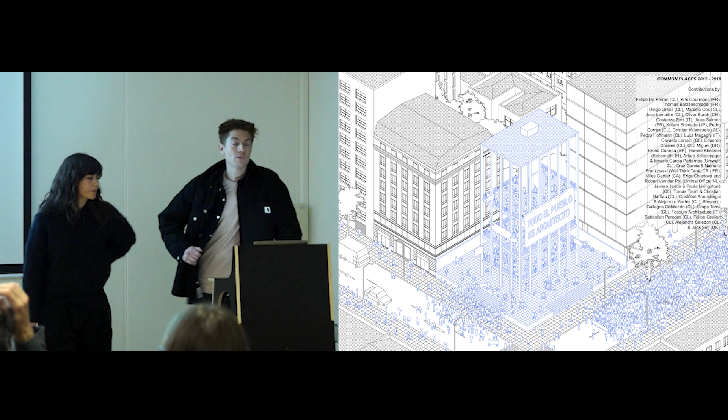This is, in a way, a very important moment of the practice. It was probably the first project we launched. It was somehow research inspired by many other researches and colleagues, really trying to find strategies to maximize collective space. It included a vast amount of people, young architects, the vast majority, and the idea was to really, through a very simple format—one isometry, one text—provide a potential strategy that decision makers and others could somehow take as a model or as a kind of idea.

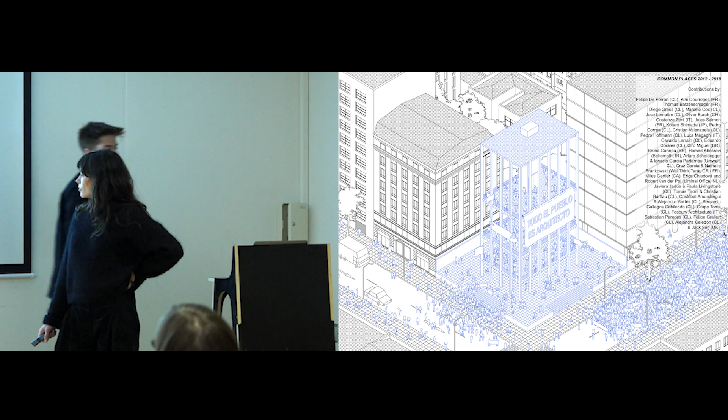And it's important because in this, what you see here is a display. People were saying all people is architect—which is something we like to believe also—that architecture is not done by experts, but actually by people using strategic knowledge, common sense, and not much more.

In a way, this is also very summary. The reality is much more complex than this, but in the presentation we will go through three main ideas: architecture as a common field of knowledge, the idea of the architecture of commons, and the idea of self-commission or self-initiative—the idea to find a project to develop. The two last ones, architecture as a common field of knowledge and self-commission, are somehow informed by parallel projects that we will also explain and introduce briefly.

So it's also important to say that since the very beginning, Plan Común is a flexible structure. We have been dealing with different phases. We were quite established in Chile during 6 years, and then we decided to re-establish the practice in Paris, which is not evident because our practice was a bunch of projects. But we decided to move, and you see that there are many phases at the moment, or let's say three main phases.

We now have the studio based in Paris, but also in Chile, in Santiago. We have a partner there, and the current structure in Paris is the three of us: Kim, me, and Thomas Batzenschlager, the third partner, which unfortunately cannot be here as well because of other commitments.

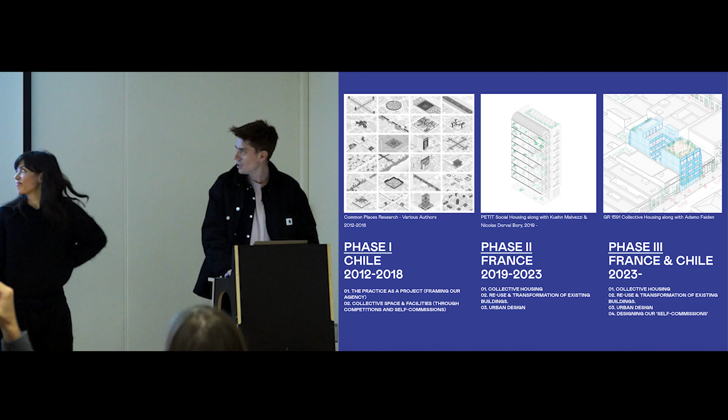We have this also very important—so you situate it, it's a practice founded in 2012. So already 12 years of practice now.

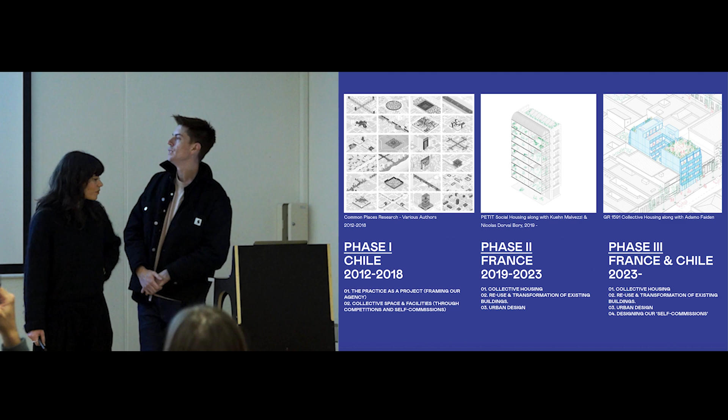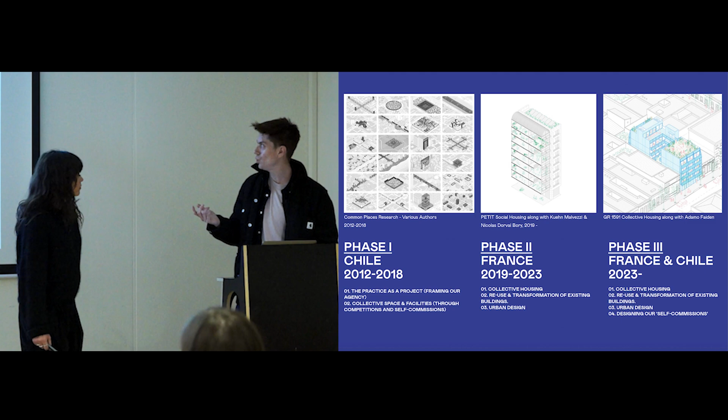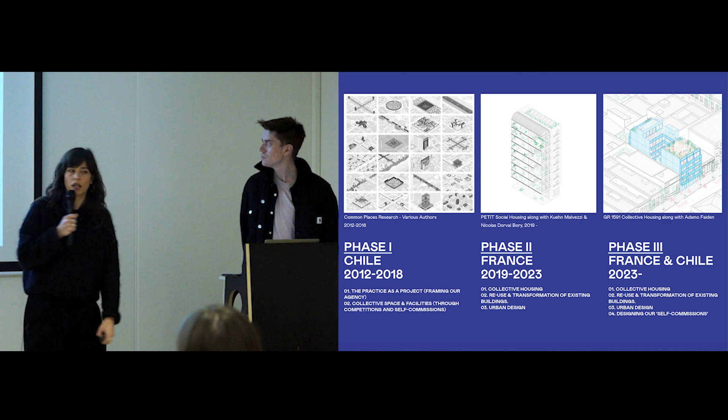In the beginning, during the first time, we went through developing the practice as a project with this attitude towards commissions, towards self-commissions, and so on. Then there is the re-establishment in France, where it's mainly about housing in different formats and reuse of buildings. And the third phase, which is somehow in the middle—reopening, reestablishing the studio in Chile, but also having this idea of self-commission. So we could summarize that phase one is developing these ideas about collective space and facilities, phase two in France is applying these ideas to collective housing among other projects, and now phase three is re-establishing the practice also in South America and expanding this idea of self-commission that we will explain later.

So first part, just so you don't get lost, is about architecture as a common field of knowledge—to understand our practice as a weaving of received ideas.

Since we were students, we started a project of talking with architects, with colleagues, and also filming architecture. This project, since 2008, we started with Diego Grass, another Chilean architect also from the same school. We have this archive of architectures—buildings, but also discourses, people doing research, people who are into the project, into a very material world, and so on. All this is a vast archive where we are obviously taking some lessons and learning from our colleagues.

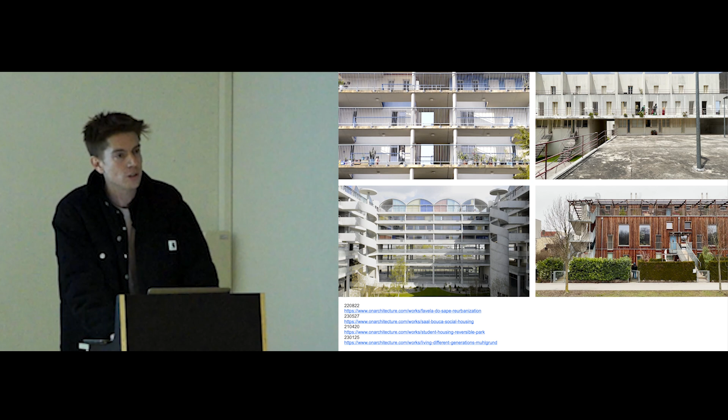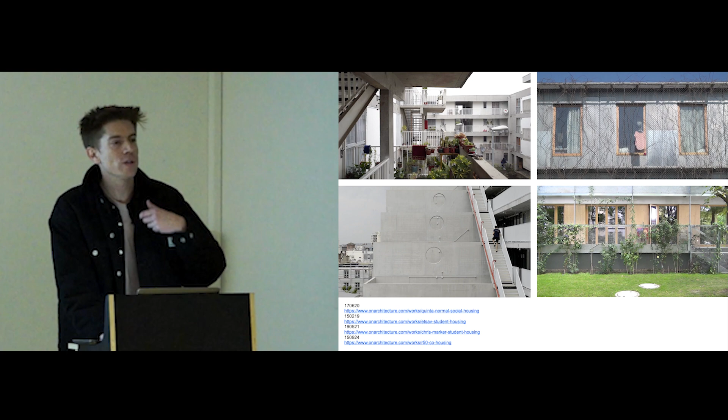Of course, this idea is very opportunistic in a way, but during the last 6 years we have been dealing a lot with housing, collective housing. We took the advantage to visit several cases and try to learn from these examples, obviously with a certain filter already about appropriation, about the sequences of common spaces, and so on.

The idea of extra spaces, generous balconies, winter gardens, etc. But also, which is quite important, to understand the conditions of the buildings, not only be amazed by the aesthetic condition of them, but to try to understand all the conditions, political, economical, social, and so on and so forth.

That's why it's quite important to talk with the architects, in this case Lacaton and Vassal and Druot. And sometimes with some architects quite insistently, like several interviews and filming several of their projects to insist also on their discourse and to establish a dialogue with them. It's quite important also that the first part is about the ideas, but also it's a way that we found - it was a kind of nice coincidence. We collaborate with a few of these practices already, and it's a very good way to start in a way.

Another idea that we use a lot is the one of poor architecture, defined by Lina Bo Bardi as, in the sense of craftsmanship, expressing maximum communication and dignity through minor and humble means. This is really an idea in which we want to insist in our projects.

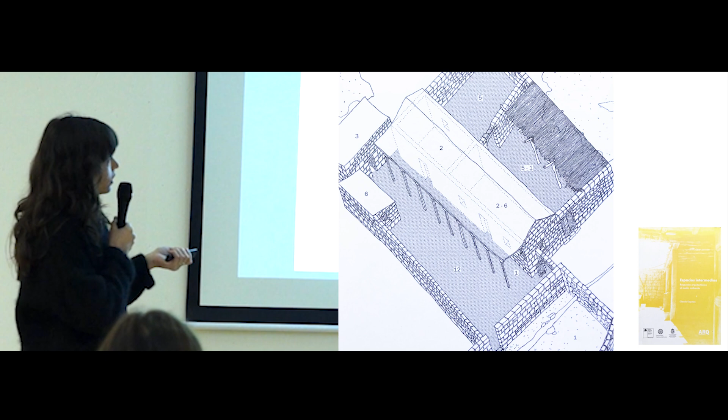There is also the idea of intermediate space, and the definition made by Glenda Kapstein, who's an architect and researcher from Chile, who studied the typical, vernacular dwelling in the northern part of Chile, in the desert, and who defines the intermediate space like this: there are spaces where the inhabitants feel as free as in a controlled interior, but that integrates natural elements - a small world that can be ordered, transformed, and domesticated, so appropriated.

And the in-between condition, there is an articulating space of the totality of the places that make up the program of the dwelling.

And so for us, a very interesting example of this intermediate space in collective housing is the circulations of the Cité Napoléon - let's say one of the first social housing in Paris, or sort of social housing in Paris. And with this circulation in the center of the plot under a glass roof, and with these passerelles giving extensions to the housing towards the collective space.

It is quite important also that forms, architectural spaces, are available in time. So one thing that can be a tool for control in one period, it can be a place for pleasure and collective joy in another time, after a few years - which is the condition a little bit now.

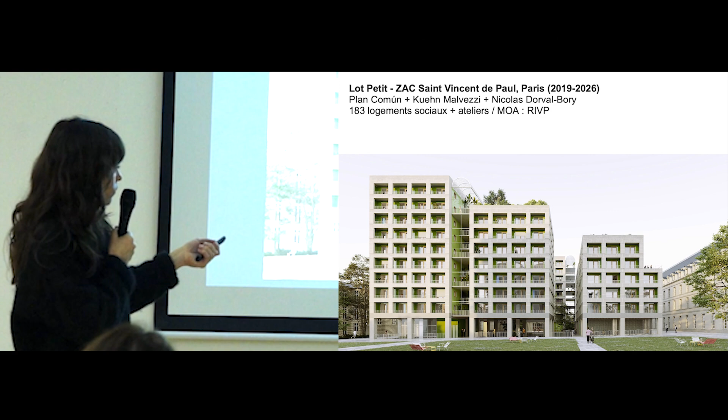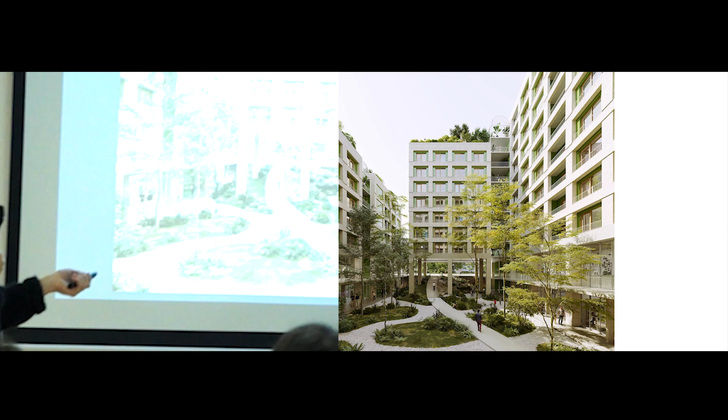And so it's a load-bearing stone building with the timber structure inside, but what's important for us is the intermediate quality of this space in between the housing, the blocks of housing, let's say. This is quite important because actually all the will that we have about maximizing public collective space in Chile - naive or somehow over-dimensioned - then coming back to a real concrete brief, has this form and this kind of proportion, in a way.

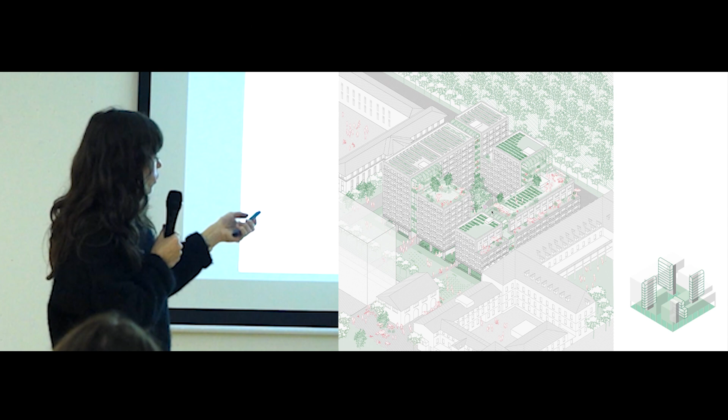And so it's a very dense neighborhood, as you can see, so you can have an idea. It's 56 by 56 square meters, the plot, with a 25 by 25 meter courtyard in the center. It's let's say a hybrid form between a building as a block and a series of buildings emerging from a common plinth. And so what articulates all this housing are these four elements, these four devices.

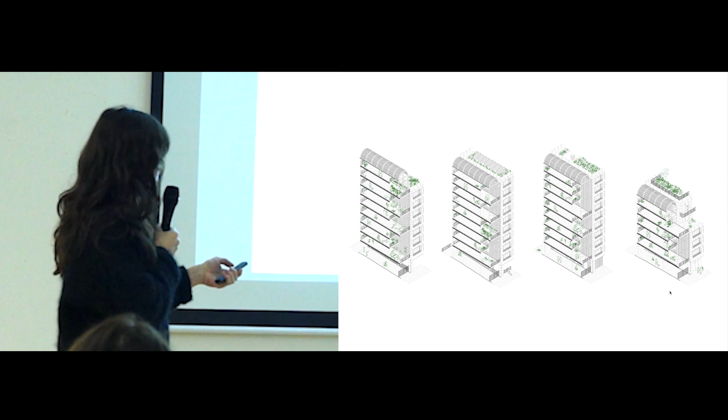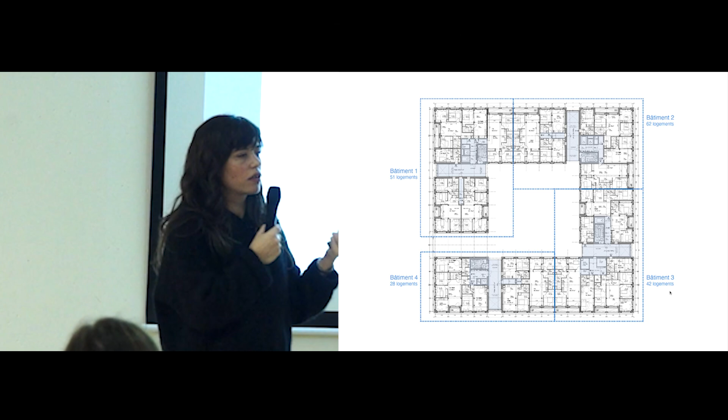These are the vertical commons and this sequence of commons - basically the open air platforms that are partially protected from the climate with the glass facade on the outside. And as you can see, these are the housing units organizing around these platforms. And so these are like over-scale circulations that can be used for other uses.

And they have a specific character and quality with these ceramic tiles, green ceramic tiles on the facades, and this glass bricks dome on top.

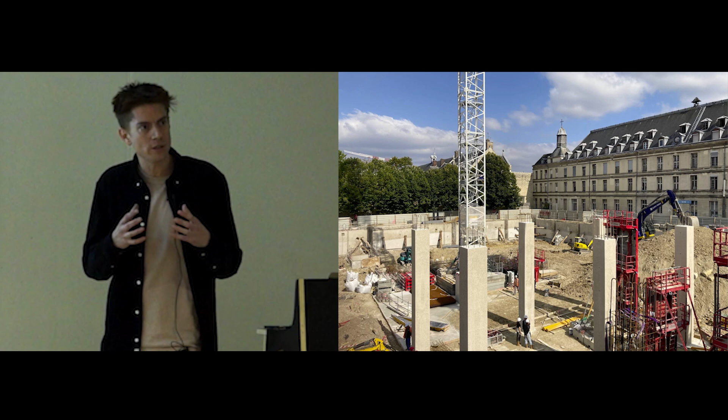It's also important, this is social housing in Paris, which is obviously, you might be more aware of this generosity in cooperative systems or different housing systems in Switzerland, but the French context is quite oppressive in a way. The lack of space we notice every day, so if we arrive to bring something more, we are somehow already happy.

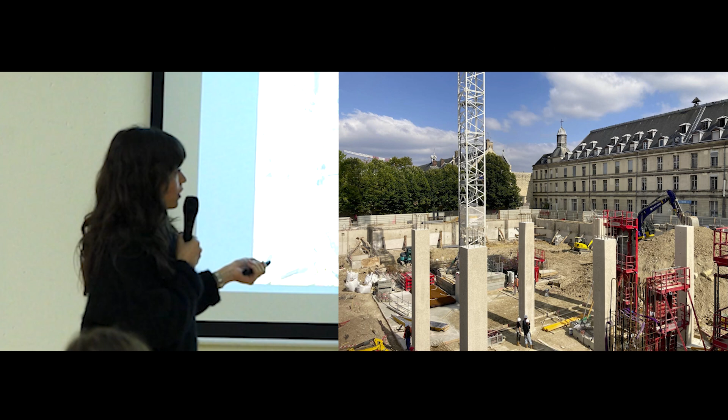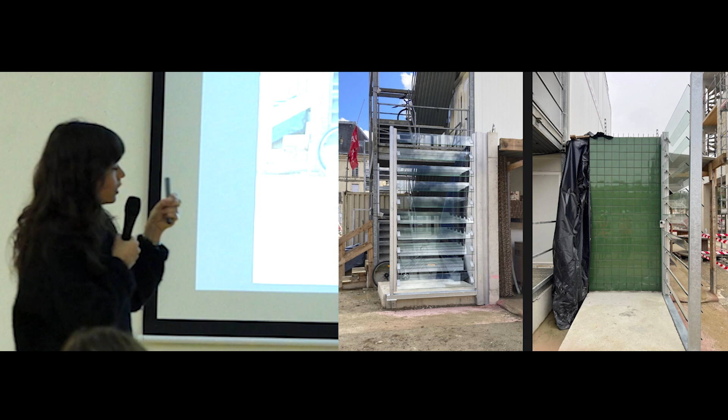These four almost autonomous devices bring this identity to the building, that are, let's say, the central subject in this project. As you can see, we are now on the building, and this is also a specific object, like the prototype for this vertical commons with glass facades and ceramic tiles that you could see in the image.

From this project, we developed this idea of having an almost autonomous device for commons in all the collective housing projects.

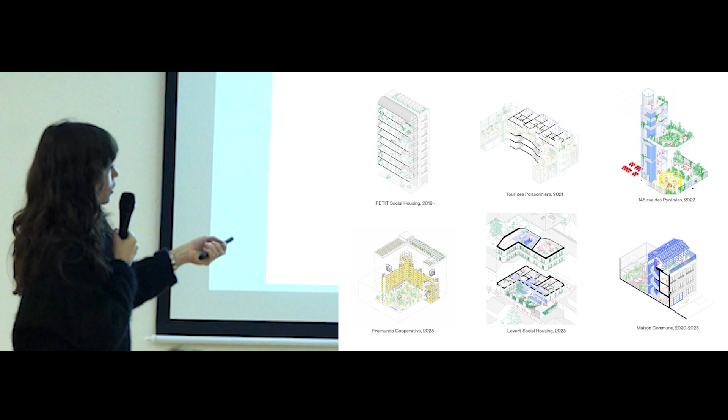For instance, in this rehabilitation, a competition that we did with 51N4E for housing, a social housing tower transformed into student housing, this device takes the form of an addition on one of the facades.

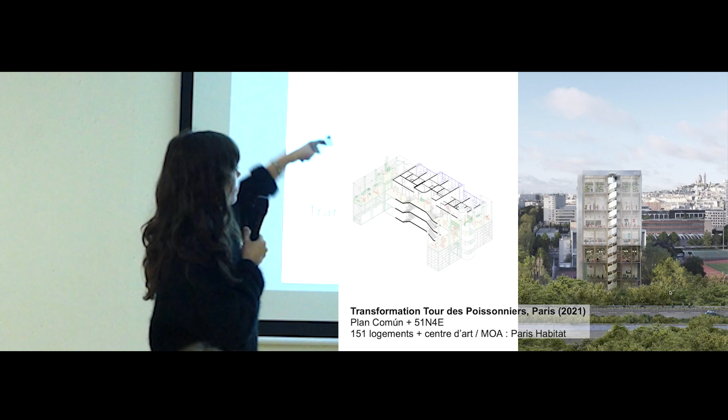We have additions on the four facades, but you have this crossing common area going from one addition to the other through the building. In this case, it's almost like a piece of furniture that makes this autonomous device.

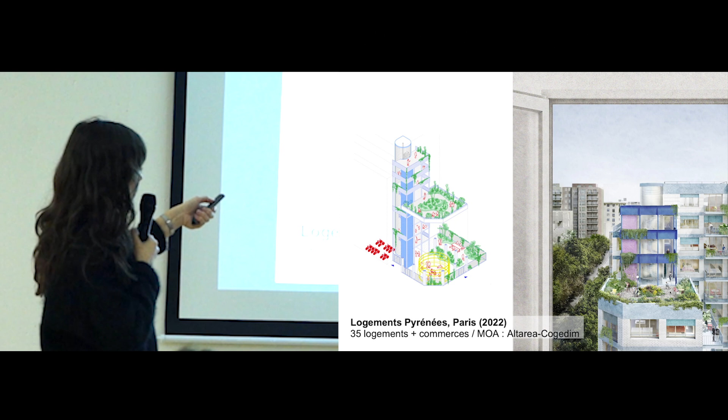In this case, in Paris, a project that we did with a developer and are currently developing, this device takes another form - it's like big platforms, outdoor areas, and there's also an extra space on the ground floor for common areas.

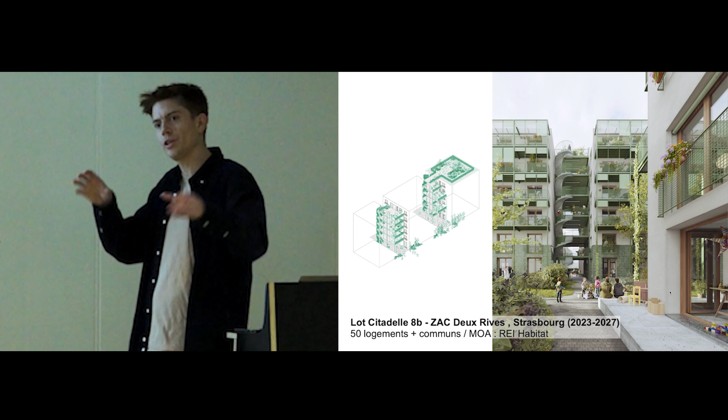Through this series, we've been developing a sequence of commons from the city to the last floor. It can be in horizontal corridor, it can be in vertical circulation, it can be an atrium, whatever the typology - it's about finding the scale, proportion, and character of these spaces.

This project in Montevideo, Uruguay, which we are doing with Adamo Faiden from Argentina, is also a self-commission. You have two blocks separated by a courtyard, with all the commons going around this courtyard.

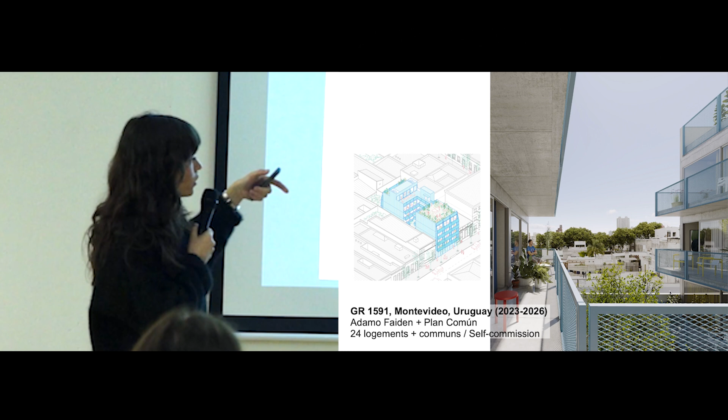Let's start with the context. The house is actually not in Paris, it's in the city of Pantin, which is really in the north next to Paris.

It's also quite interesting, and funny, that this place is really next to the second biggest cemetery in Europe, which is around 112 hectares. It's a coincidence because we spent 5 years researching the cemetery in Santiago, the main cemetery there, as a metropolitan garden. So to be here, next to the cemetery, even if it's quite different from the one in Santiago, it's somehow interesting.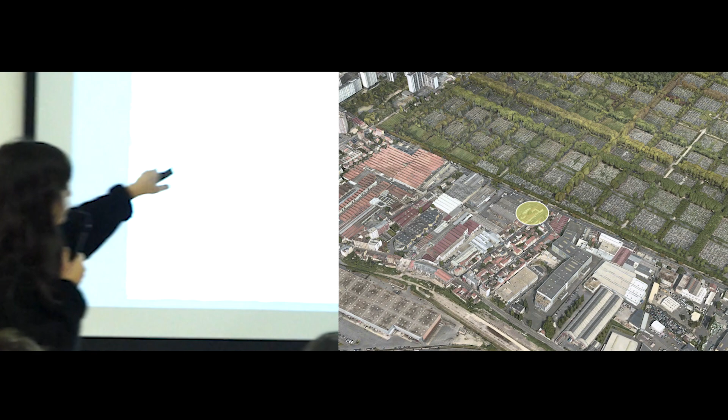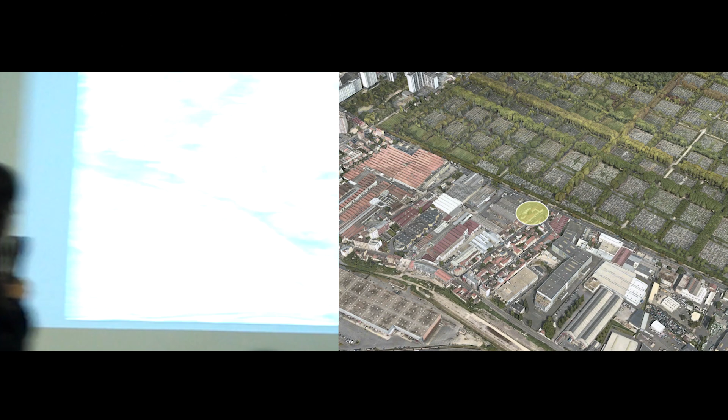So it's a small residential enclave inside this industrial area that is still in use, small industrial. And there is even a kind of association of the quartier, of the district, of the small neighborhood, where people organize already. So there is the situation more in plan, let's say, a small neighborhood surrounded, enclosed by industries of different kinds.

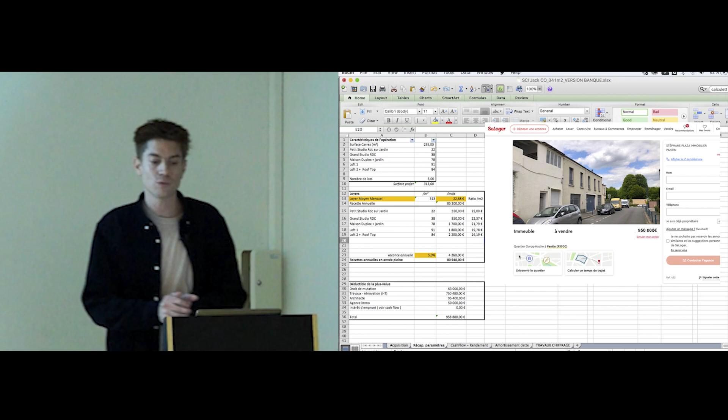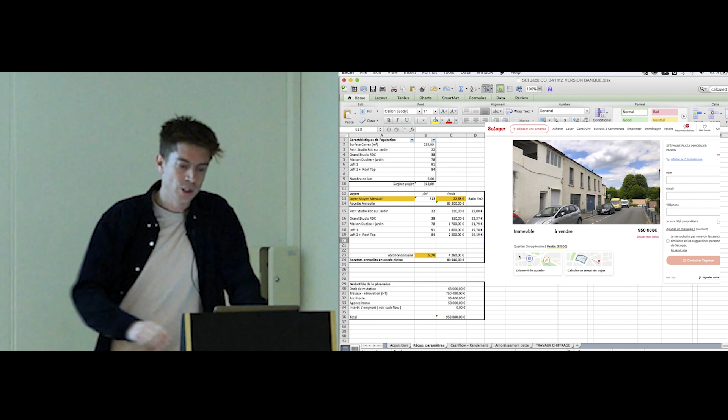And then, coming back to the idea of self-commission, the initiative that we took from the studio, with a very specific expertise by our partner Nissim Hagenauer in looking to find the investment to buy the house and start a project.

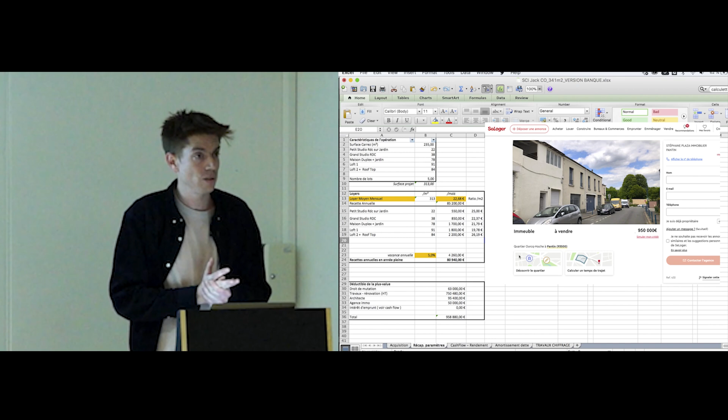Now you see the rough numbers over there. The idea was to actually meet people, a very close bunch of people, for bringing this idea of renting the building, not for selling apartments. Yes, the idea is to use the savings of people that they would put in other investments anyway, or at the bank, and use it as the initial investment for this project. That's also a prototype.

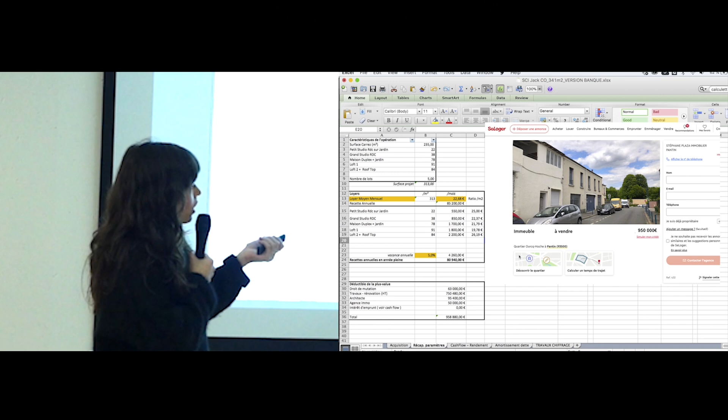We will go further later, but we were kind of lucky. As you can see, we didn't buy a plot, but we bought a house, an existing house. And we were kind of lucky because, of course, there was a developer who was interested, but there was a misreading by him about the urban regulation that was at our advantage, and that's how we got to buy it instead of him.

It's very important to see the house, and this is the only time you will see the proper house because it's not there anymore. The idea, the preliminary project, was to build an extension of this house, and to build already the shared space.

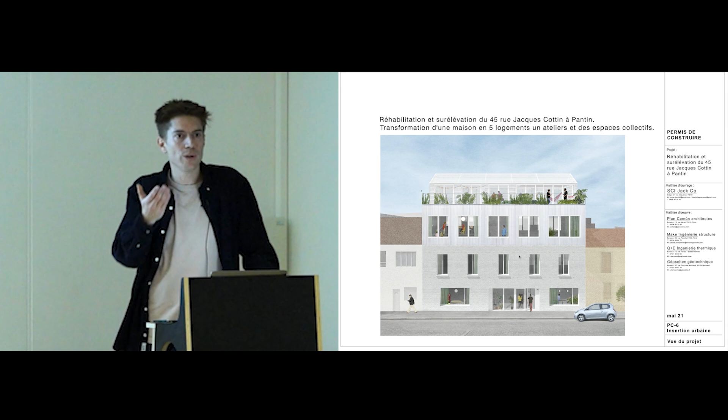We will go through the detail also about regulation, because we could have had one floor more over there, but we decided to have the greenhouse. This was the documents we delivered to the municipality. But actually, through the studies, and you might be aware of the complexities of transforming, which is sometimes more costly, we decided in the end that it was really difficult to keep the building.

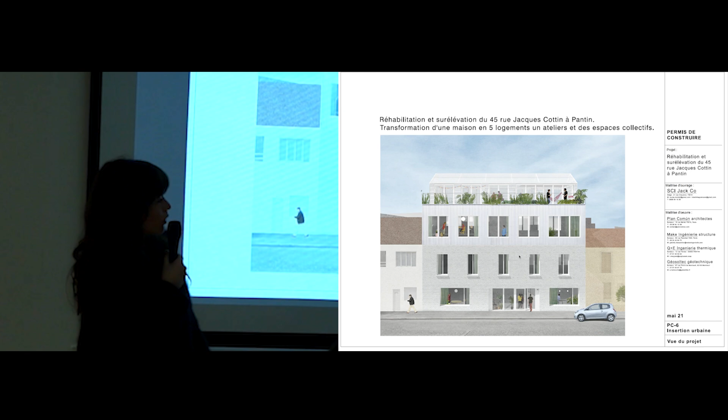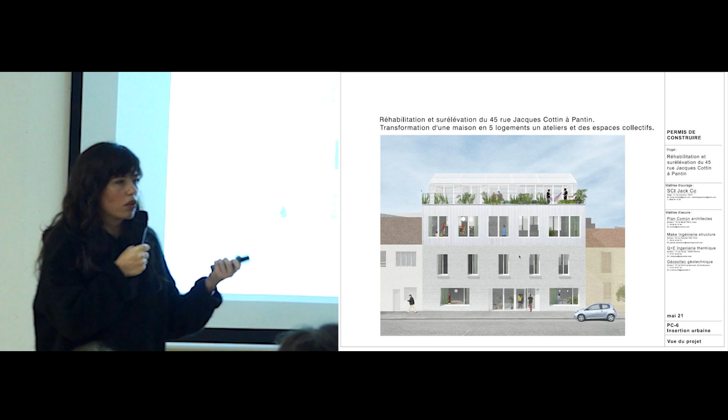Why? Because on the building site, when we started to curate the building, we did an investigation before in the existing walls, but on site we discovered that the brick walls were actually not chained together. There were two layers of bricks that were not structurally linked, so we had to demolish. It was already a decision we made on the building site. But it was a decision.

It was something we were, of course, influenced about, this idea of keeping and finding the quality of this place. But then, in the general context of the whole operation, with the difficulties of the material condition and the fragility of the ground, we decided to build a new one. And this is what we actually introduced to the municipality as a new project.

You might see that it's more or less the same. The sizes of the windows are changing, they are bigger, more generous. Obviously, the structure is quite resistant, and we are trying to bring some specific qualities that you will see afterwards.

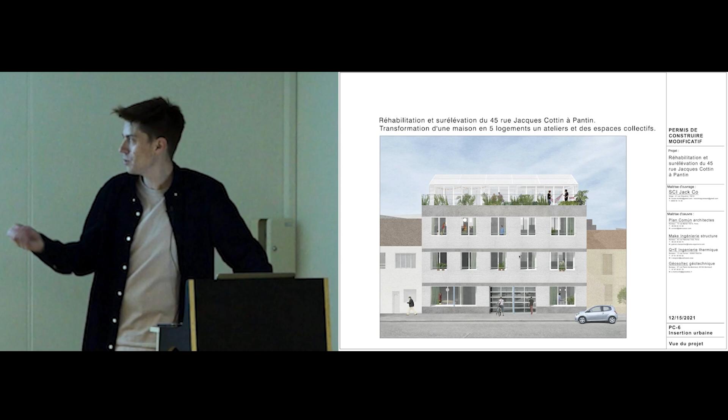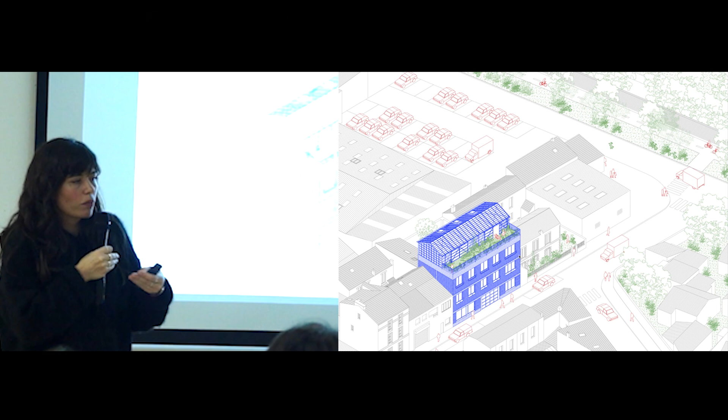But basically this was already something in the process. We were able to adapt the project as we do as architects many times. We were really doing the project on site, drawing the plans almost at the same time we were building.

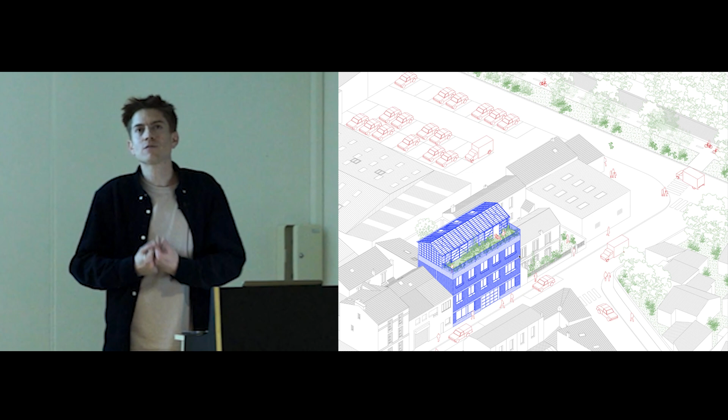So in this case it's also quite important to clarify what I was telling before: that potentially, as for the PLU regulation, we could have had one floor more. It means one big apartment or two apartments, it doesn't matter. But as we are trying to ask for more in each brief, it was the same for us.

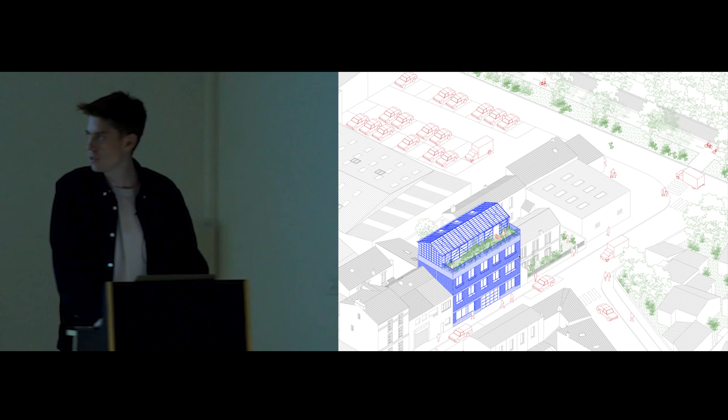So we talked with the investors and convinced them that our approach was to have less density, which would allow us, on one side, to bring a nicer coexistence with the surroundings, with the houses on the sides, because of the lack of light and so on, but also to bring these important shared spaces for us, crowning the sequence.

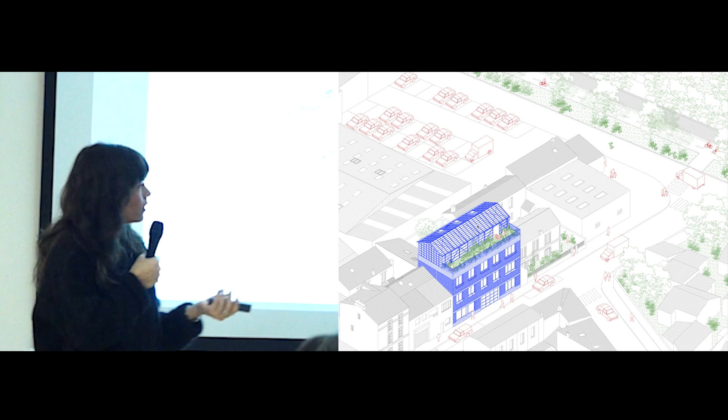The volume that you see here could be all private housing, and we only had to do a little setback on the last floor, but not as much as this one. But actually, as we were minding our own business in this case, we were aware that the numbers were working out anyway, without this extra floor of housing.

So this is the context. We are just next to this very big industrial hangar in the back. This is the more enclosed Quatre-Chemins neighborhood, and you see the urban landscape, which is quite interesting and beautiful. As you can see, we are densifying a bit with regard to the existing situation.

With this extra floor as translucent, more open and generous, instead of housing. It's also important to say the existing house had a continuous facade, but actually it's an L going until the end of the plot. So we took the part in the front and kept the house in the back of the courtyard, which saved around 40% of the original structure.

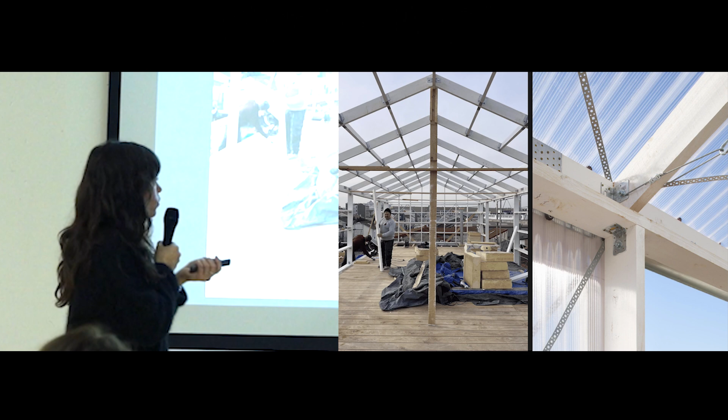So it was a small building, too small for a crane, for instance. So we had to build using construction methods that could be handled by two men, let's say.

For instance, you see the glass house, the greenhouse on top. It's built with one same timber section used for the whole structure, with very simple connections and bracing elements.

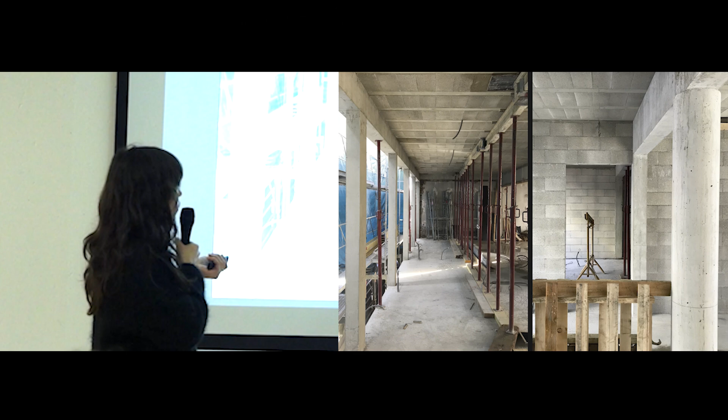It's the same also for the housing, with the concrete skeleton filled with prefab elements like concrete blocks for the walls or also for the slabs.

When we say simplicity always, that's actually not totally true. We are dealing with a lot of complexity in bigger projects because of regulation, administrations, and cultural differences. In this case, it was again developed by us. We tried to bring some clear principles: the concrete skeleton, and then just manipulate the things you can move with your hands.

For the facades, we wanted to use fillings of reused bricks, which was a bit of a gimmick we'd had for a few projects, because we were asked to reuse elements in the projects, and it was always very difficult to do it for the structure or the facades. So it was also an opportunity to demonstrate that it was possible, in technical and insurance terms.

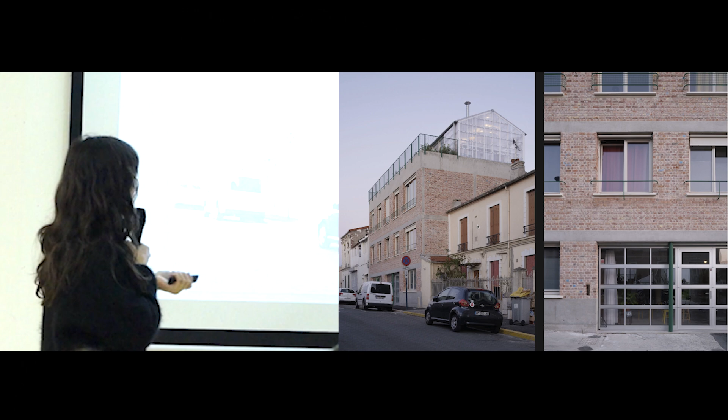As they arrived on the building site, we discovered it was actually beautiful, so we kept them on the facade towards the street with the traces of their former life. But towards the inner courtyard, we painted them white to give unity to this outdoor space.

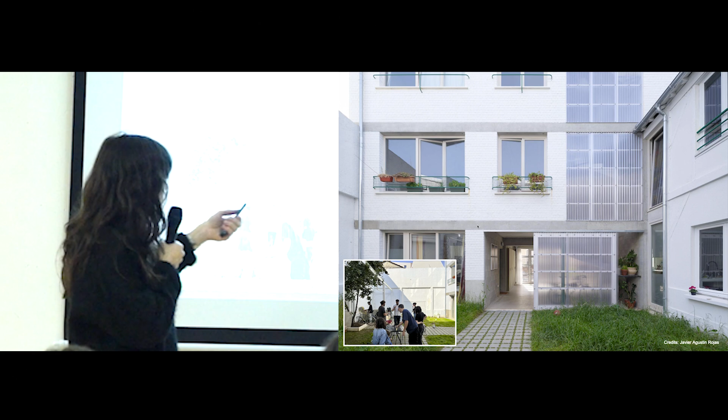Delimited by four different walls of different qualities. This was a very tough decision. We were four partners, and sometimes partners were saying okay, all white or all rough. At one moment we said we don't need to decide. You never have this full comprehension of the building from both sides, and we need the white in the courtyard because of the lack of light, and also the unity with the existing house, the one that you see here.

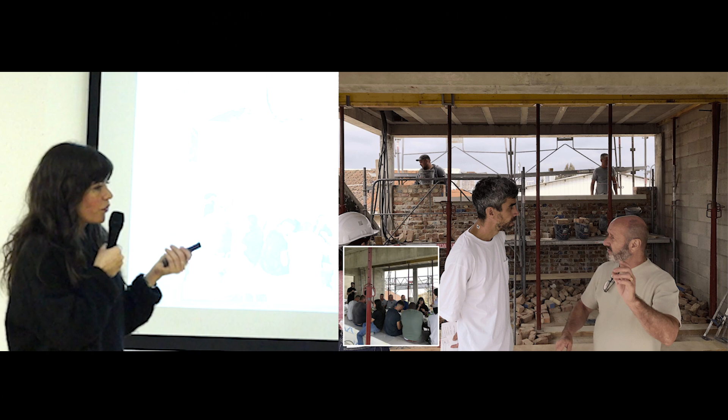We were lucky also to find a constructor used to a bigger scale, and they were really comfortable on this rather small scale building. It was an intense work of learning from each other and finding solutions together, since we were doing the project while we were building it.

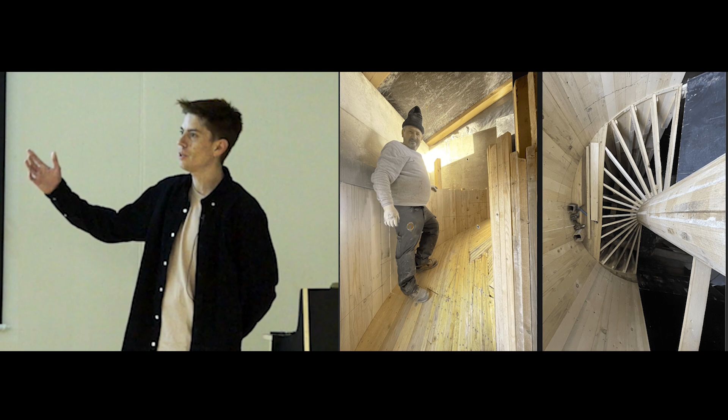And even also challenging the structural engineers. Mario Laporta, the owner of the company, comes from Sicily, and he was doing vaults, working with bricks. He has a lot of experience in building, and he was saying, okay, but we will not do the stairs as you are proposing because it's too big, too over-dimensioned. We will do it in another way.

And we arrived at this very thin stairs because of them, actually. They insisted.

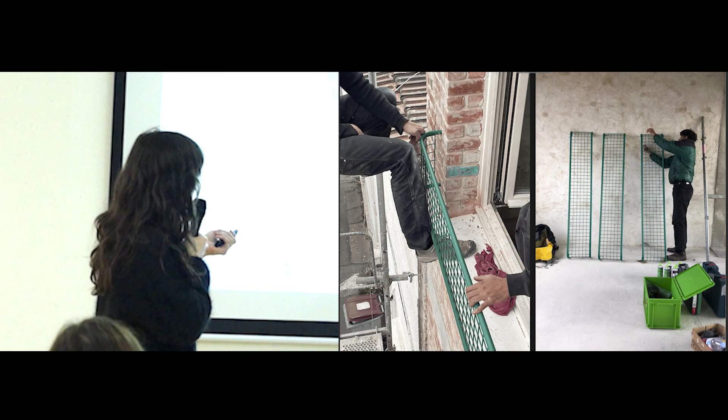Then you would also see there is an issue about the door towards the street of the hall. We worked with, as you can see, a rather rough language, and we took special attention to all the railing and metal in the building. We worked together with Charles Bédin, who is an architect but working as a metal worker, to imagine all these elements that give a special quality to the common areas of the building, like the railing on the facades.

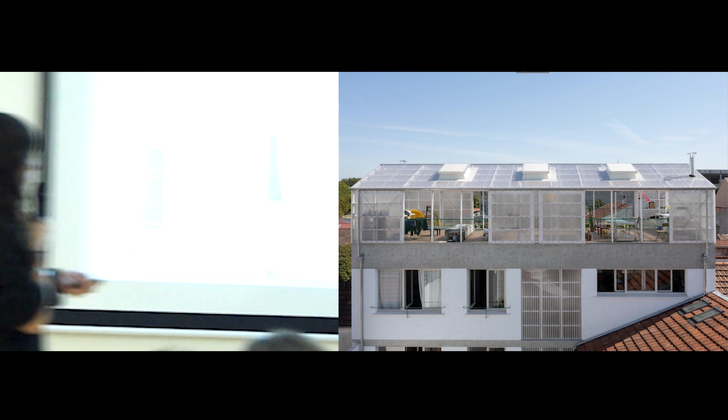Here you can see on the facade this continuity of material from the greenhouse on top to the facade of the staircase, which is this corrugated polycarbonate material, translucent and cheap, very cheap.

As you could see on the other photos we showed, there are no outdoor extensions of private balconies or terraces. All outdoor extensions of the housing are collective and shared.

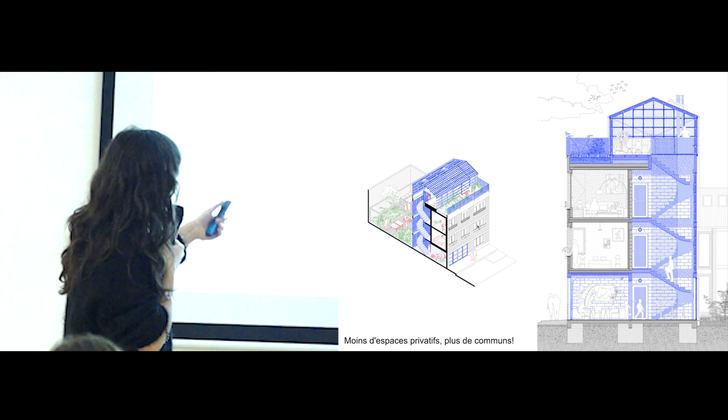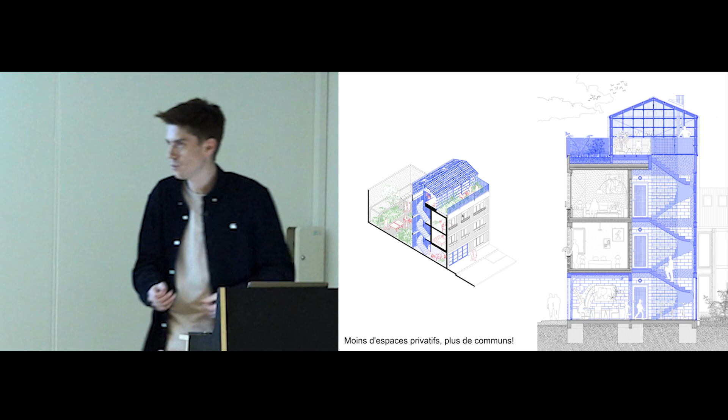Here the sequence of commons starts from the hall, goes towards the garden on the back, and up to this rather small staircase, but with some qualities, and on top the greenhouse and terrace. So it's the opposite of fragmenting, to have the stair circulation hidden, and then greenhouse on top, and then something else. We try to bring coherence and unity in the different floors. This is quite important for us, and that's why we insist on the sequence of commons.

This sequence starts with the hall, with this relation towards the streets that is very transparent, with this sectional door that can be totally open. We had the chance, because it's a small-scale building, that fire regulation allows all the common areas to be open. So we have this continuity of space from the ground towards the top.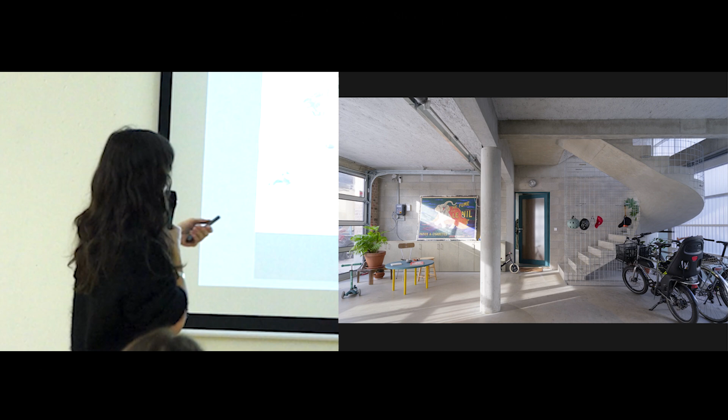Also with the staircase, we were not compelled to close it, so the hall is an open space that can have different uses. It's also a bike storage. You have everything you need in a hall, but it can also be used to have a drink or whatever. It's used for encounters and collective life.

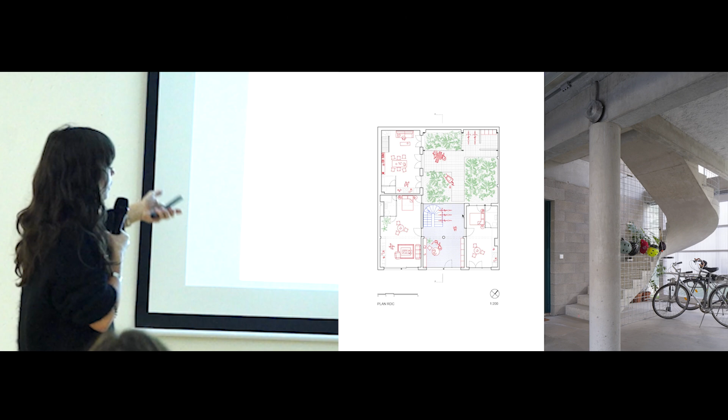You see the proportion of the hall regarding the apartments on the ground floor. The hall and the garden are almost half of the plot. We're adding this sectional door, used normally for parking, but actually we have the structure there, so there's no way we can enter with a car, and we don't need it.

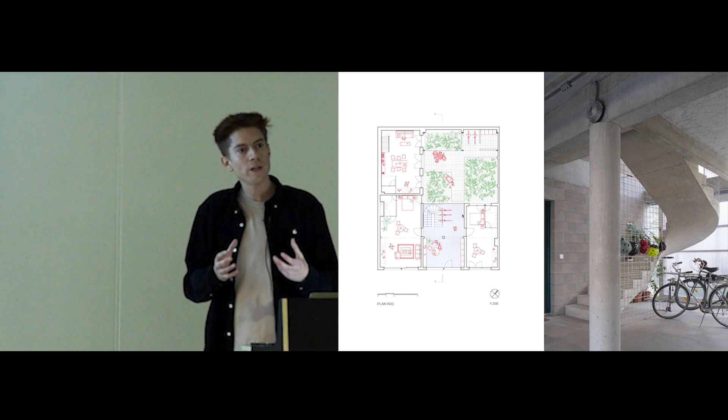The idea was to find coherence in the sequence of commons. As we have the polycarbonate, this lighter material, we wanted a more direct connection with the city, opening when possible, when there is good weather in Pantin. The hall has this extension towards the garden, and is closed on this side with the big sliding door with corrugated polycarbonate. So you really see the sequence on the facade from the inner courtyard rather than from the street.

So this is the sliding door. Very simple detail, and cheap.

The staircase is a very small space, really reduced, not over-scaled like in the Petit building we presented before, but only with this facade. It's a really qualitative space because of this translucent facade, and it's really used every day for collective life as well. It's probably the most used place in terms of collective life. It's where people smoke a cigarette or drink a glass of wine. Every day neighbors go out, say hi, and stay 10 minutes. We weren't all friends in the beginning, and now we're a community of 13 people that uses this place a lot.

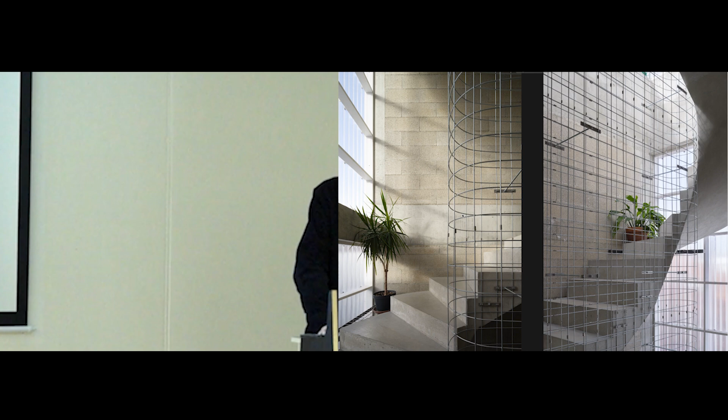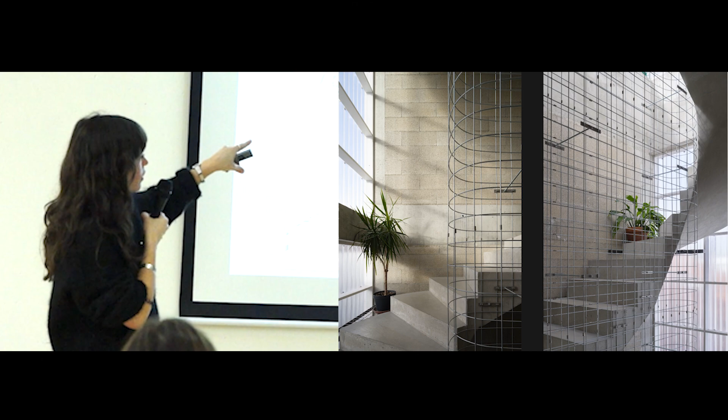With this metal work, it's very simple elements, like a metal mesh of 10 by 10. As you could see in the other photos, it was only folded and then assembled with elements from electrical devices. So it's a kind of bricolage, but it gives these beautiful elements in the center of the staircase that add to this quality.

And then we arrive to the greenhouse, which is the main social space in terms of capacity, but also the place where the propaganda of collective spaces appears more clearly towards the surroundings. You see when it's used, during the day or especially by the end of the afternoon or during night, this lamp in the middle of this weird, very specific context.

And so it's at the same time the cheapest space of the building and the most qualitative, because you are on top, you have this view and these great opening sliding doors. And it's a space that gathered several uses from daily life. We have a kitchen and laundry. You have 2 washing machines that we use there. Otherwise, the private housing units have everything, and they also have the connection for a possible laundry machine, but we use this all the time.

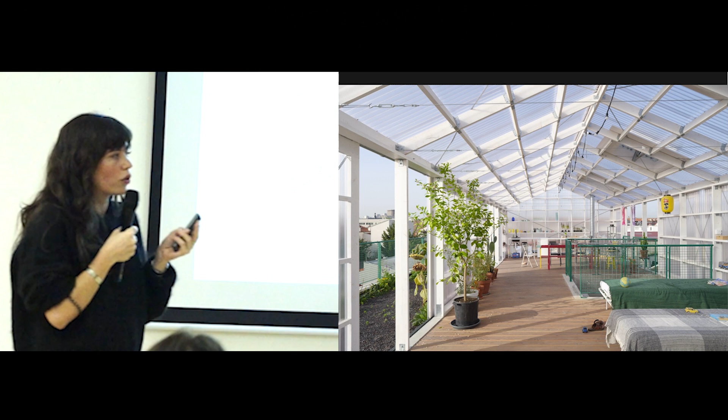And it's a space that is on purpose non-defined, and that can be used for a series of daily or more exceptional uses. As Kim was saying, you have the same section profile in wood, very cheap and not necessarily the way greenhouses are being done here in Europe, or in France, it's less industrial, and we have these cables, so we try to bring the full volume and open to change, open to adaptation in time.

Yeah, and these cables also participate in the small infrastructure of the common areas, as you will see. So we see the relationship with the context again, and from the surroundings of one house of a neighbor. And so there is this terrace in extension that is like the garden on top.

But perhaps we are arriving at the end of the conference. And it's important to say that in the beginning, it was not obvious to live all together. It wasn't obvious for us to live 3 partners in the same building. At one moment, we engaged in this process.

We said, okay, we will live together and we have our community. And we have the chance actually to see the building in adaptation, in uses and changes, which is quite privileged for us, and we just take photos for ourselves, but also we will share some of them with you. They are different types of photos, but the vast majority by us, but not only. So we see actually how the spaces are being used really in daily life.

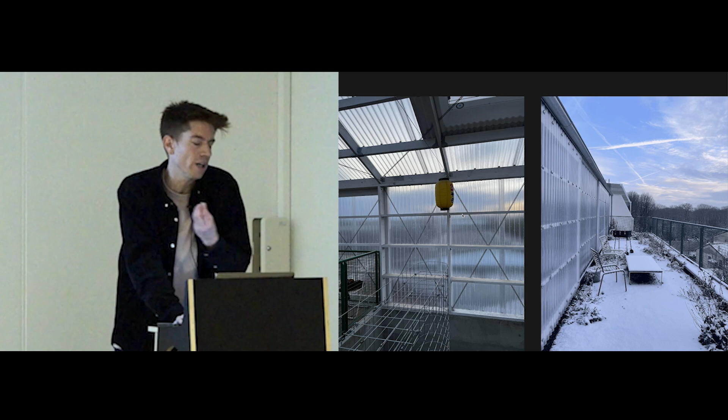Coming back to Glenda Kapstein's definition, this is an in-between space. It's living with the environment. If it's too cold, obviously it will be cold inside, it's not a stone wall. So we need to understand this and the possibilities we have there. But also when it's open and there's nice weather, you can have a nap there, or use it in many ways. It's a very generous living room that can be used by all the inhabitants all the time.

We decided in the project not to have a system of shading because we thought it wasn't needed. At least during the first year, textiles appear quite strongly for giving shadow, but also in everyday life as we use the washing machines over there.

And for parties. So the last part is about how we expect, or are on the way to try to reproduce this, coming back to the idea of the self-commission, to try to look for designing our own briefs or be part of this decision. La Maison Commune was for us the prototype of this parallel activity that we want to develop, to bypass the usual developer and their functioning, and to manage our own numbers, to actually... it's not revolutionary in the sense that we're using the tools of housing as in the market, but twisting the numbers a bit and managing to give more common areas and shared spaces within the same system.

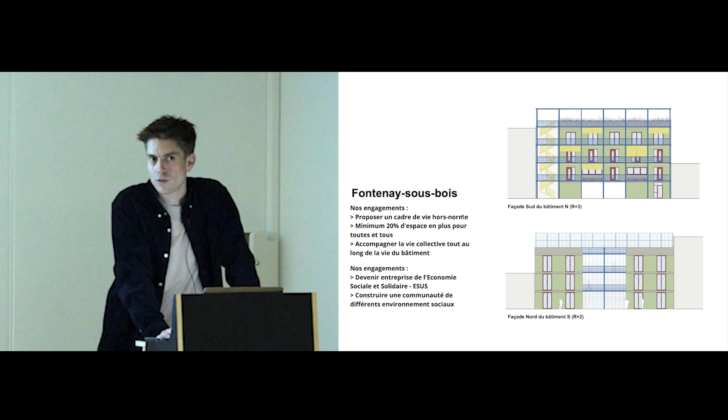It's important to say this idea of the Foncier Commun is something we've been dealing with during the last year, and it's ongoing. So what you're seeing over there is actually kind of a summary, and we are trying to keep this summary and this force through project by project.

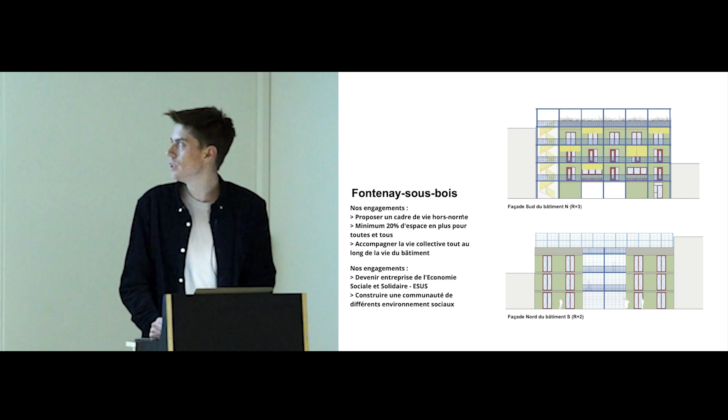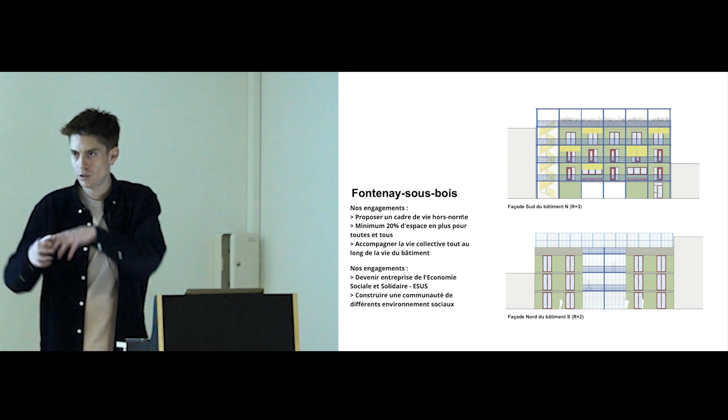We are actually already developing one. We're not arriving as private individuals buying a house from another private party, but we approach three cities in the surroundings of Paris that we see could be interested in something like this, to see if they can put some interesting plots forward to evaluate. If they give us a margin, a bit of time for studies, we might have time to find investors. The idea is not that we architects suffer and find ways of bringing this sequence of commons into an impossible equation, but actually to try to find the conditions for these kinds of projects to appear.

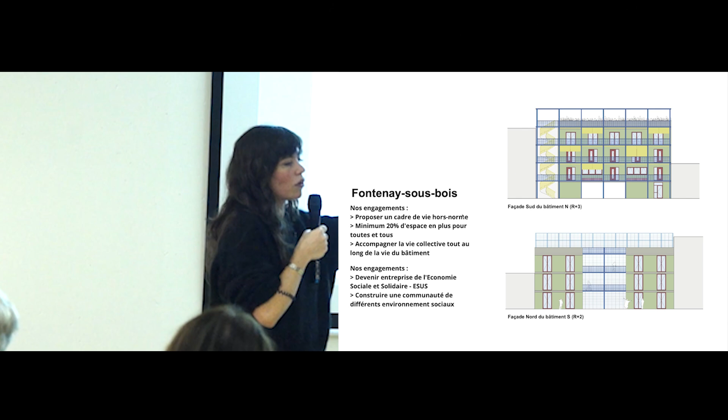Yeah, and it's also not a co-housing project in the sense that the idea is also a different form of ownership, where it's a collective ownership. It can be compared to a cooperative, but the people who invest don't necessarily live there, and if they live there, they are not owner of their apartment, but of a part of the company that owns the whole building. That's the case in La Maison Commune.

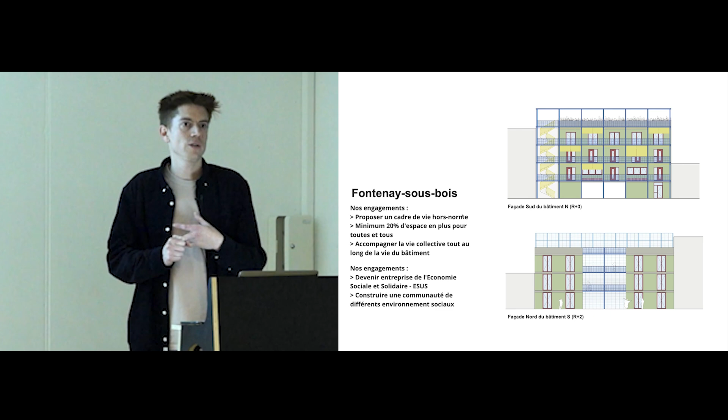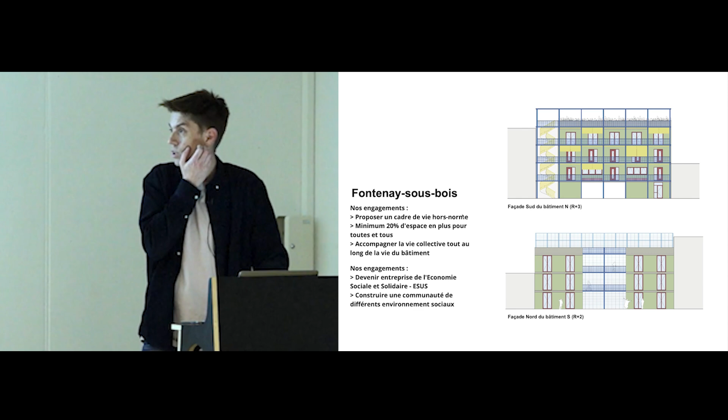And this is part of perhaps a kind of general conclusion, but we are totally open to deal with the contradictions we are in now. We are trying to develop social housing, and we are trying to apply to more and more. From time to time we go through cooperative competitions. We also do private competitions with private clients, developers, trying not to be super conventional, but still. And then we look for self-commissions, like the Maison Commune you see, but also the one we are developing with Adamo-Faiden in Uruguay. In the end, the idea is to find specific conditions for each project to appear with this kind of will. So, yeah, thank you.

Thank you so much, Kim and Felipe, for this fantastic presentation and beautiful project. Although you shouldn't take too seriously my feedback, because some colleague told me I'm usually too nice to guests. So we expect maybe you will get more tough. Bad cops over there, yeah. Yes, but I have to say I stand by my judgment. I think it's a really incredible project.

I have actually a very simple question, which is, the use of color in your project seems to be very important. There is a deliberate use of color also to mark certain crucial moments. Maybe, I don't know if you can elaborate on that, because it seems to be a very strong feature in your projects. Perhaps we can go through Lina Bo Bardi, no?

Coming back to the definition of poor architecture, which is actually this idea of maximum communication and dignity through very humble means. So if you see the Maison Commune without the greenhouse and without the handrails in green, well designed, you will see it as a very banal and generic building, no? And we are adding these moments to reinforce the qualities we want to highlight. It's about bringing roughness and more sophistication, it might be, but also because we are, and you see, there are very pragmatic decisions. For example, using white here to gain light and so on. But we are totally interested to mark, to bring these small moments of color, and it's not a minor subject. Obviously the subject is to choose which color, and this can be an endless discussion, in the sense that we don't work with a palette like other architects who know which color or tone they will use. We say, okay, it can be green, it can be whatever, and then we discuss, no?